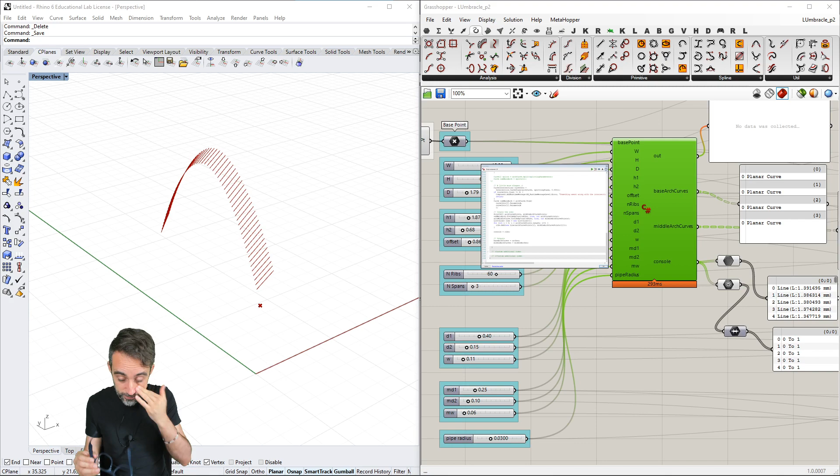So this is going to be part 2 of the YouTube stream that we started this morning, where we were taking a look at modeling the Calatrava's umbracle in Valencia, and we were doing this in pure C sharp, in C sharp scripting within Grasshopper.

I did not finish the exercise. We still have to design all the ribs, copy them and clone them, generate the profile beams and output them as well, and then the tubes, the surfaces. Hopefully that's not going to take us very long.

I think we're like most of the way there, so I think we probably want to wrap this up a little bit earlier today, because it's also super nice out there, and I would like to enjoy the Saturday, and you guys probably want to enjoy it too.

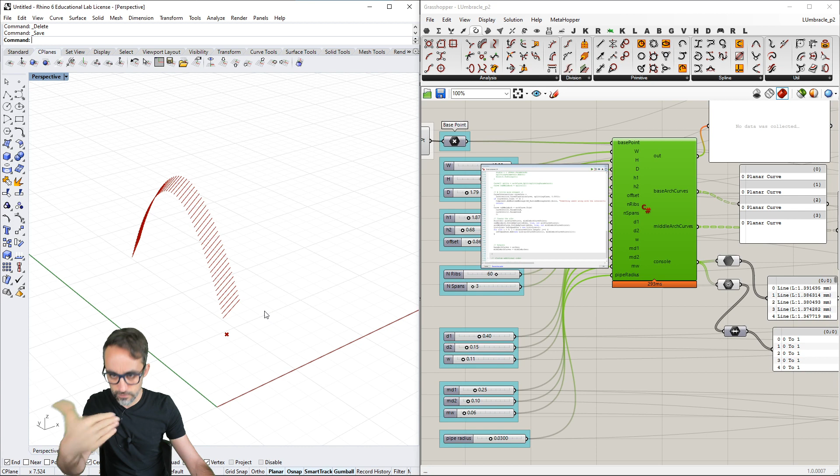But since those points are actually the exact same ones as the one that I have here, I can basically just take all those points and move them to the right, or create new points on the right hand side at a distance of span, and then just use those as the base.

So for example, arch curve points, I'm going to refactor this to be on the left, arch curve points on the left. Then I can, for example, take it back. I'm going to create a new curve on the right, and subdivide that one... no, I'm going to stick to what I said.

Okay, so I'm going to say now points arch curve on the right. This is going to be equal to a new point array, which is going to have the same amount of points that are currently here on the array of points on the left.

So I'm going to create an empty array, points on the right, and then with a for loop, I'm going to populate this array with copies of the points that are on the array of points of the left arch. This is very hard to explain.

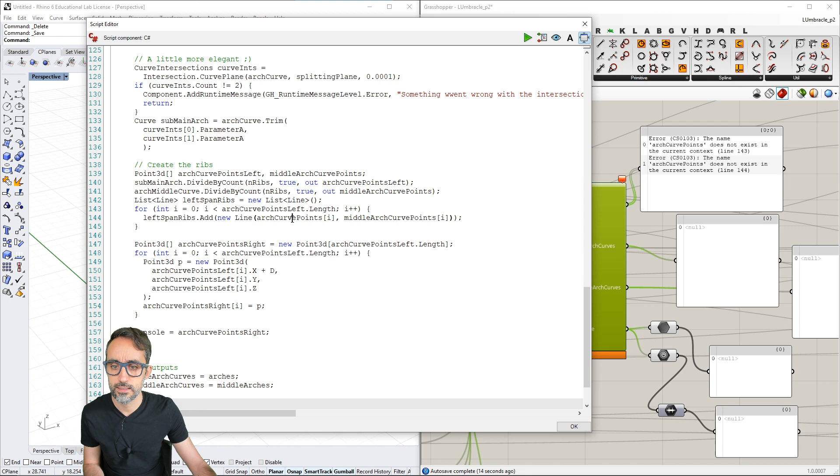Okay, arch curve points that don't exist, 143. So when I was refactoring this one, I have to remember to refactor this, and this also has to be refactored there. Okay, and then you can see that I have here my points on the left, on the right. That is looking good.

And then now that I have the points on the right, I can say, well, let me create a for loop. Let me create an empty array, an empty list of line elements. That's going to be right span ribs. It's going to be a new list of elements. Okay, and then with a for loop, I'm going to go over all of those elements.

So that's going to be arch, all the points on the right hand side, and then i++, and then here I'm going to say I'm going to create a line. L is going to be equal to a new line between 2 points. Which 2 points are those going to be? Those are going to be first the first point on the right arch point, so this one, okay?

And then the second one is going to be the points in the middle arch. Those were here, middle arch curve points. Also, the one in the same position, the one in position i. And after that, I'm going to take this and I'm going to add the line that I just created, L, to this array. Let me see if that works.

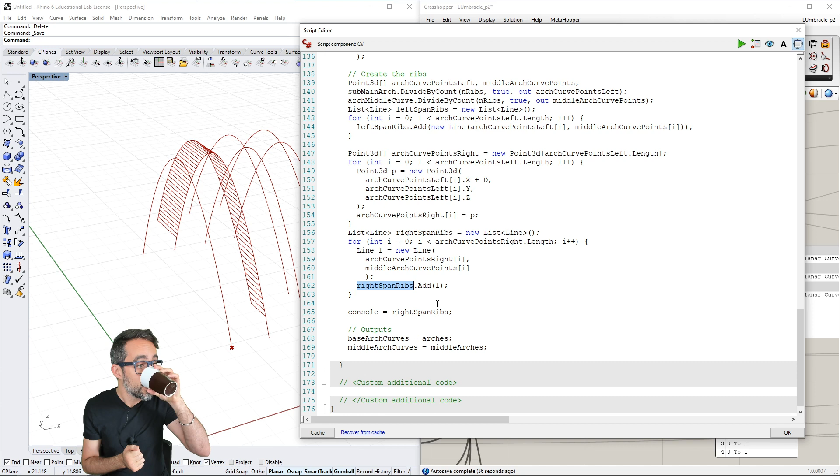So now what I need to do is I just need to create a data tree, and one by one for each one of the spans, start copying and moving all these ribs in sequence. Okay, let's get that going.

So how are we going to do this? Well, just like we did before, we have a data tree, and then for each data tree, we take for each span, we take all the left ribs and the right ribs, we clone them, we move them, and then...

Do line elements have cloning? Let me check that. L dot duplicate, curve, copy, clone, closest point equal extend through box. Good. I knew this was going to happen.

Okay, so we can do this, and then we can just say duplicate curve. Doesn't line... it doesn't belong to geometry base. Interesting.

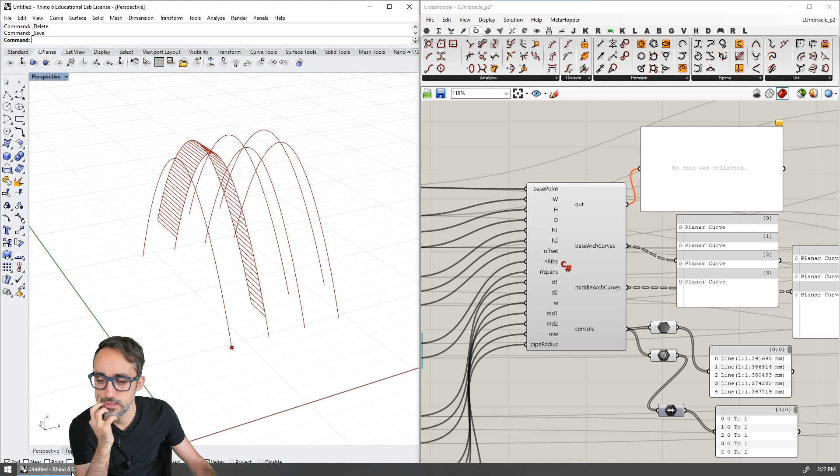So let me try one thing out. Line foo equals a new line between 0,0,0 and 1,1,1. Line bar equals foo. If I take point at, to NURBS curve, point at length, extend distance to, so we can't really.

Interesting, because they're just lines, it's going to be more difficult to... So if I do this, does foo change? Foo, does the point in foo, is that a reference or a copy? It doesn't change, so it is a copy, so I can just copy them.

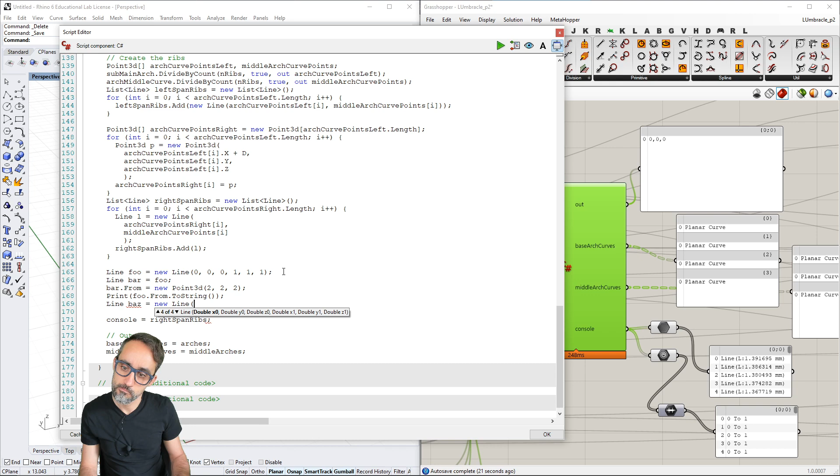So do I have something like baz is going to be equal to new line... So can I just add to this a new vector 3D? This is a little complicated. This is over complicated.

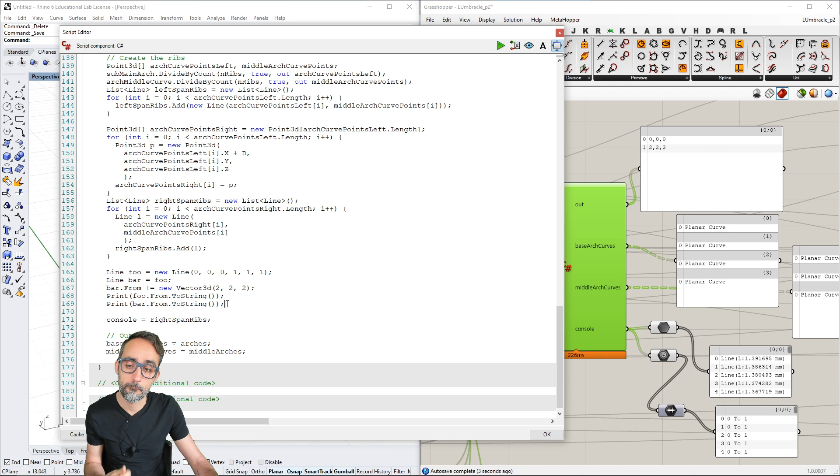Print bar from to string. Am I complicating things around here? I think I am, yeah. Well, this is how we started, so we're going to have to do this.

I hope I'm not going to mess this up. Okay, so where was I? I was saying that we're going to do a data tree, and then we're going to copy everything, and we're going to... okay. All right, so let's create the data tree.

Okay, I'm going to create the base ribs here, and then I'm going to create, okay.

Let's get to it. So I'm going to create the ribs data tree, and then very simply, I'm going to create a data tree of line objects, which I'm going to call rib lines. This is going to be a line object.

Then we need to create a for loop which is going to iterate over all the spans that we have. So that's i is less than number of spans, i plus plus, for all the ribs on the left.

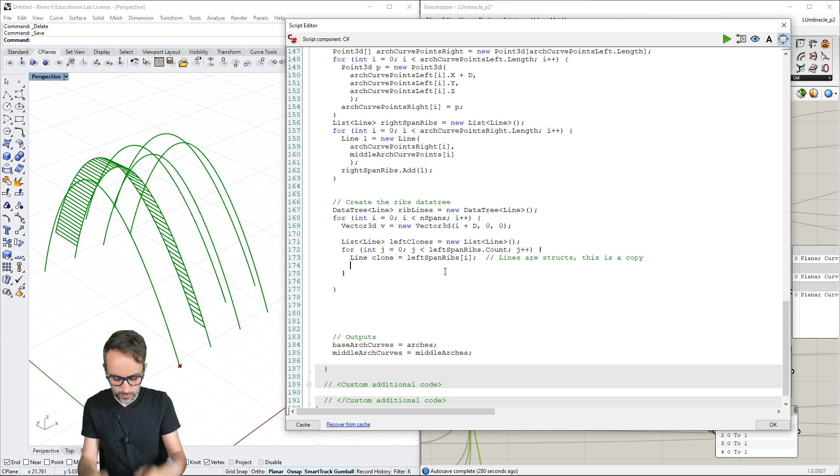Okay, so let me show you. Now that we have clone here, in order to move it - lines don't have the duplicate curve method, the duplicate method that we've used before, and because of that we can't really translate them, and they also don't have a translate.

And this is also because since they are structs, they do not inherit from the GeometryBase class, and therefore they don't get all that goodness.

So what we need to do is be a bit more manual here. We need to take both the starting point and the end point of the line, move them with the v vector, and then that becomes the modification and translation of the curve of the line.

So here what we can say is clone dot from, which is the point where the line segment starts, and then increment that location by the vector v.

And then we can also take clone dot to, which is the end point of this line segment, and do the exact same thing - increment its coordinates by the coordinates of vector v. Okay, and we have this now. So we have created a copy of clones here.

Once we have that, what we need to do is in the rib lines, create a data tree, create a new branch. So grasshopper path equals new grasshopper path, like we did before, and use i as the index of that path.

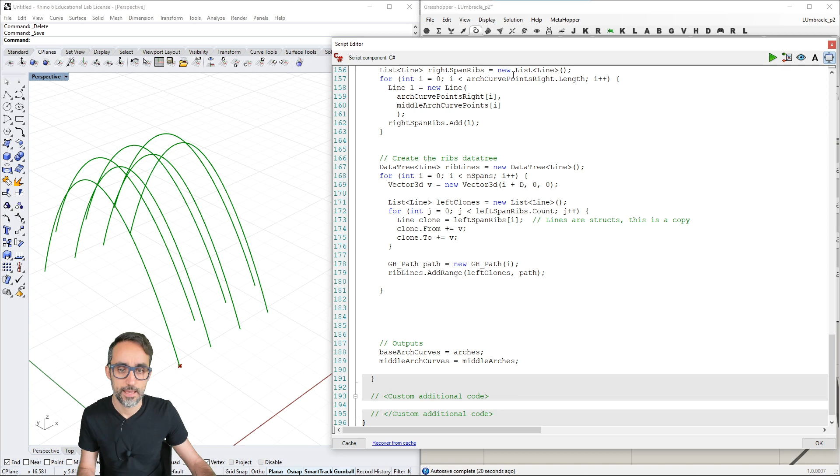I may not want to use rib lines here, because it's a duplicate name with this. So I'm just going to use, for example, rib axes. And here I'm going to do that here as well. And then rib lines is going to be equal to rib axes.

I do that, and it looks like nothing has happened. What do we have here? Oh, they're empty. I forgot to add the clone to the list of left clones, so we were doing the process but those lines were going nowhere, and this list remained empty. So we were adding empty lists to the data tree. I do that, and it doesn't work because I've misspelled something.

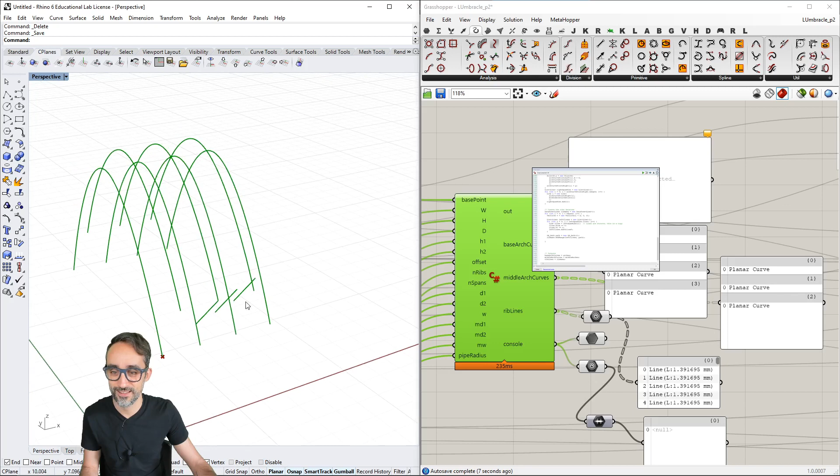Yeah, I said clones instead of clone. I do that, and ooh, something went not very great. I've only moved these 3 lines here. Let's see what happened. It's probably something with the left span ribs dot count, line clone. Okay, let me take a look at this.

Simon, can you create a curve of degree 1 between points instead of a line? We can do that, but that would create a curve object that is more expensive computationally. It's not as clean, as lean as a line object is.

So even at the expense of the code being a little more tedious, I want to keep it as the simplest geometry object possible, since these are straight lines, which is going to be a line. If we were to turn those into NURBS curves of degree 1, each one would be much heavier because it would have the control points, the knots, etc., and we don't really need that. So even though it's a bit more tedious, the resulting geometry is going to be much easier and leaner to handle by Rhino. So okay, what are we doing here?

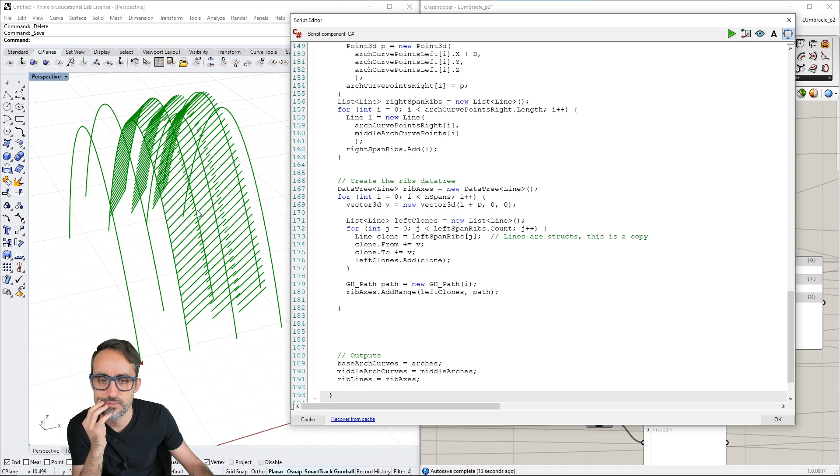Huh, but they're also not where they're supposed to be. Okay, so console equals left span ribs.

There's something odd here because this should not look like this. Can anybody see what am I doing wrong here? Oh, this is I. No, that's I. That should be J. And why are they moving?

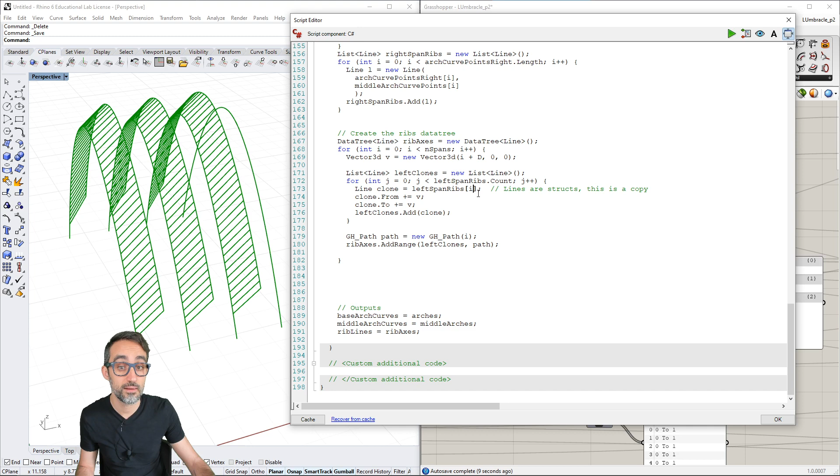Oh, because it's I plus D. It's I times D. Okay. All right, okay. So that was it, and that was here. Okay, so we're good.

Yeah, this is what happens with coding, trying to code things fast. I am in a nested for loop where I'm using I to iterate over the spans, and I'm using J here to iterate over each one of the ribs. And here in left span ribs, I used I, the span iterator, as opposed to J, the rib iterator. So if I change that to J, now we get this for each one of the lines.

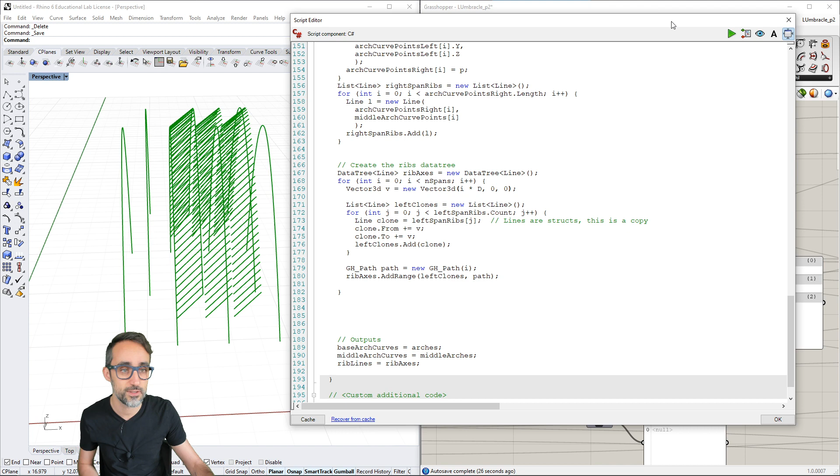But also you guys can see that they're not exactly where they should be. The first one should be here, the second one here, and the third one here, and there's an offset, and this is because I also made a typo here. This should be I times D - the number of spans times the distance between spans, instead of plus. So I'm going to change this, and have it here.

Okay, that is great. And the tree that I'm pulling out of rib lines also looks great because it's branch 0, branch 1, branch 2, and they have all these lines. Okay, so that's great. So let me just fill in for the ones on the right. This is going to be super similar.

I'm just going to take this and say right clones is going to be equal - be careful with copy pasting, okay? So right clones, new list, blah blah blah. This should be right span ribs, blah blah blah, and then clone is going to be right span ribs, clone from clone, and then right clones add clone.

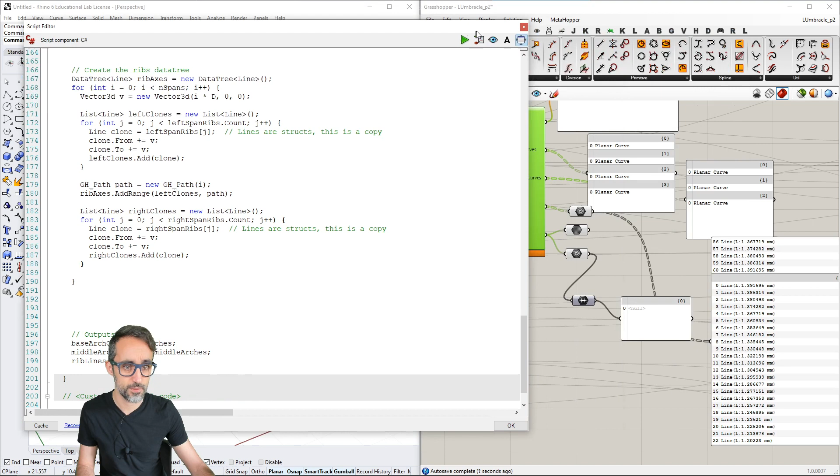Okay, if I run this, there's no errors, and then I can copy paste this and path, new path, blah blah blah. Actually this is redundant because I already have the path, right? So what I want to do is right clones - I want to do this, and then you can see that now we just duplicated the clones on the right, and they have been added to the tree where they should be, on branch 0, branch 1, and branch 2.

However, I hope you already know me at this point because this is nice, but it's not as clean as it could be. What happens is I've done this very fast, and now in branch 0, we have all the lines, all the ribs on the left, and then continuously, without separation, the ones on the right. So if I needed down the road to make a distinction between the ones on the left and the ones on the right, maybe the sun is hitting from a different orientation and I want the louvers on one side to be thicker than the other, whatever.

I would have to manually go here, divide the list in two, split them, whatever. So since we're here already, why not create a nicer data tree structure where the ribs on the left and the ribs on the right are much easier to see and are already separated in different branches.

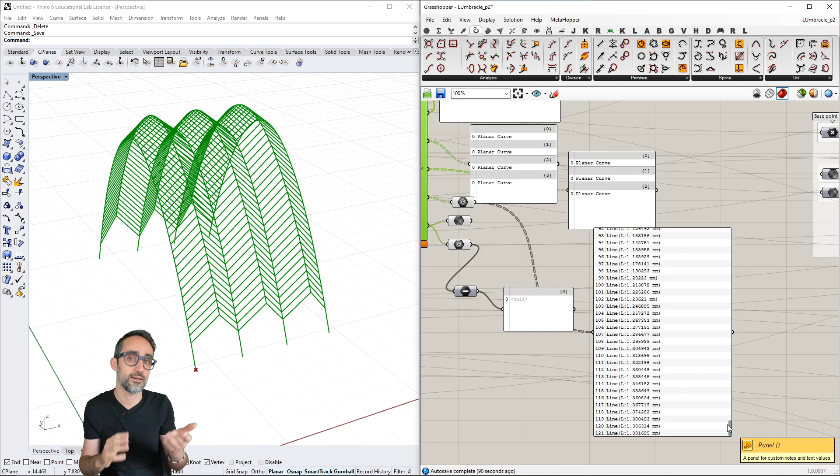So what I'm going to do, I'm going to do it in a different way. You could argue, well, if you're now creating 3 branches, 0, 1, 2, because you have 3 spans, why not create 6 branches, 0 through 5, and the ones that are odd are the ones on the left, and the ones that are even are the ones on the right. We could do that, but that's also not entirely clean.

The nice thing about data trees is that the branch allows nesting of levels. So because we have a modular system that has 3 spans, I would like the first level of the data tree, the first number, to tell me which span I am in, and then I'd like to add a second level to the branch, a second number that tells me if it's 0, it's the ones on the left. If it's 1, it's the ones on the right, and then have like a branching data tree structure.

That's actually super easy to do, because we already divided that process very cleanly here. What we can say is I can create first for the ribs on the left, a new path. You see how instead of creating, I can create an empty path, a path with one index, a path with an array of indices, and then I can create a path copying it from another path.

So what I want to do is create an array of indices that represent the levels of my data, of my branch. I want the first level to be the span that I am in, so that's going to be i. And then the second level to be 0 if it's the ribs on the left, and 1 if it's the ribs on the right.

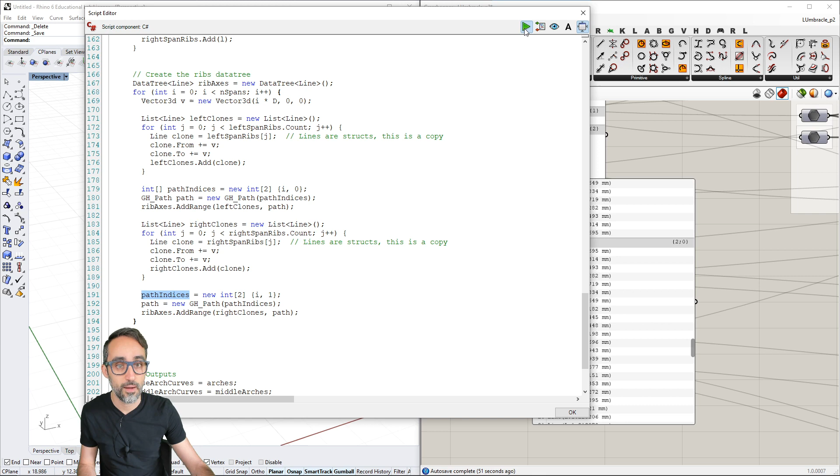As I run that, check this out. We have 0, 0 here. I'm going to lower the number of ribs to 10 only. And then we have here 0, 0. It's span 0, so both have span 0, but then 0 is the left. This is very hard to say, but these are the ones on the left, these are the ones on the right, and then these are the ones on the left, these are the ones on the right.

Can I plug in here this thing so that I can see. Look, you guys can see, we have this branching structure.

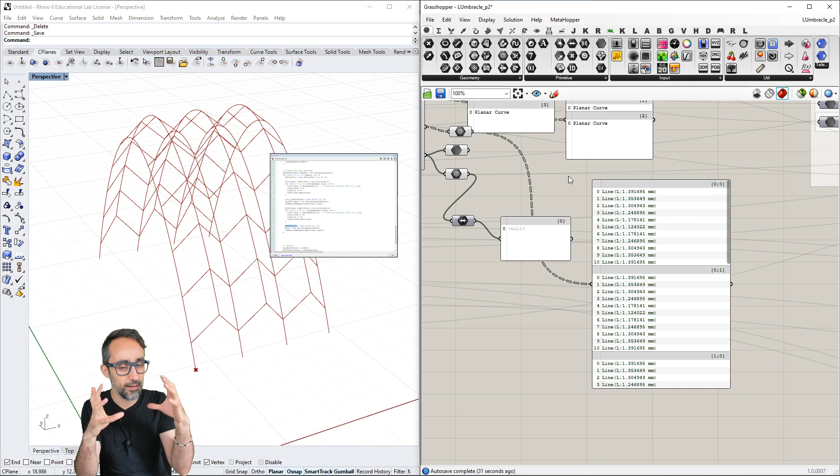This is representing the structure of the data tree. These are the elements, these are the spans, and this is how they separate between left and right. I think this data structure is much cleaner as an output, and whoever was to take this data could operate much more cleanly with it. So I find that solution much better and much more pro, so I'm just going to go for that.

Okay, so that was a lot. But I think we're ready now. We basically have the whole building already.

Now with the number of spans, we have the whole building written in C# script, and then we can just modify the width, we can modify the height of the elements. Oh, this is actually quite cool. And then we can make the spans wider. This is like the Madrid airport almost. This is kind of cool.

Now what we need to do to complete this is, if this was a competition, create solid object surfaces so that we could render this, as opposed to the lines we're doing here, which could be used as an axis for the structures. So let's go ahead and create the variable thickness beams for the arches and create the tubular pipes for the lines. Okay, let's do it.

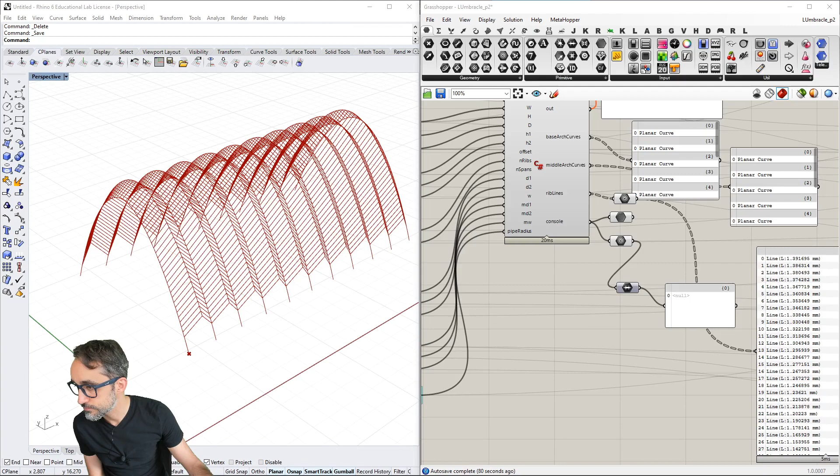Okay, I'm going to load here the diagrams, the diagram for the beam. Okay, this one here. Okay, I'm going to save this.

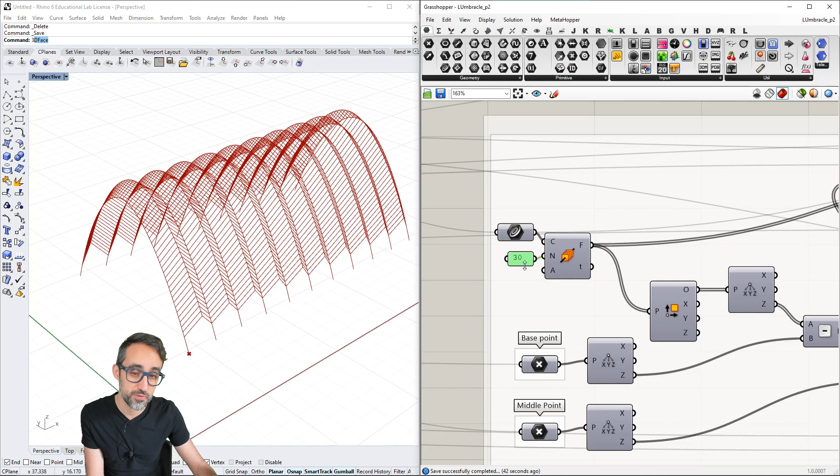So what else, and then how are we going to start? Let me remind myself, how did we do this before? We divided the curve into a bunch of points, and we hard-coded this to be 30. That was a little arbitrary, but whatever.

So we found perpendicular frames, and then created rectangles with variable thickness. And then based on the rail, we just did a sweep with one rail curve. Let me look that up before.

And then we get B reps, perform sweep. And then perform sweep, we get the curve, blah blah blah, rail, cross sections, and we get an array of B reps. Okay, we can do this, I think.

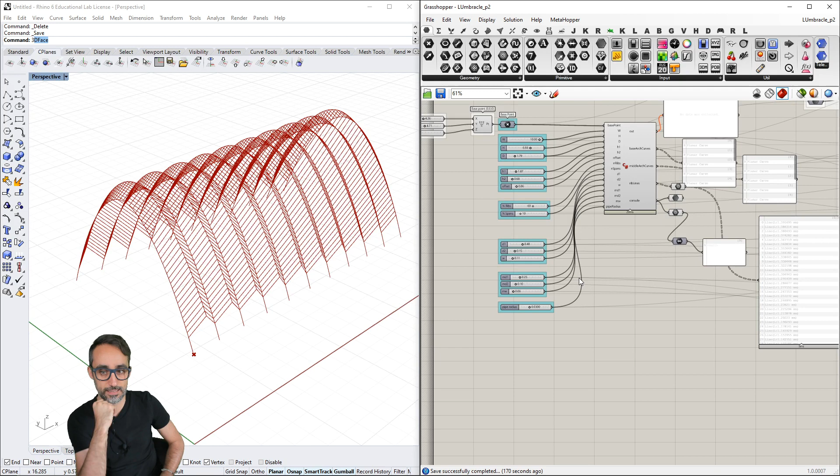How can we create a rectangle on a plane? That's easy, right? Okay, we have Rhino geometry. Do we have rectangle here? Rectangle3D structure: represents the values of a plane and two intervals that form an oriented rectangle in 3 dimensions. And can we turn this into a NURBS curve? Yes, okay.

Okay, that's a little complicated. Maybe we can start with a circle. Is there a circle on a plane here? I don't think there is, no? Circle structure, okay, represents a circle in 3D. The values are used: Circle, plane, initializes a circle on a plane with a given radius. Plane and radius, okay. So we can start with a circle. And then D1.

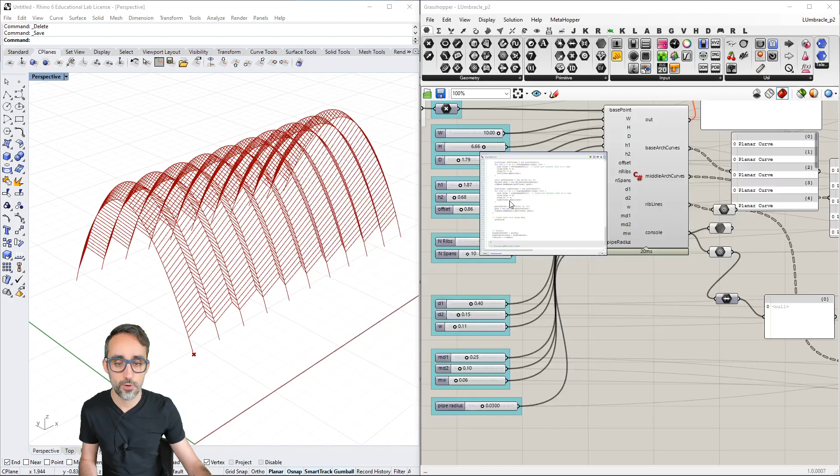There's got to be something in RhinoCommon, and I was looking it up before, and we have the curve subdivide get perpendicular frames method, which gives a collection of perpendicular frames along the curve. So that's probably going to work. The return type is a bunch of planes, which is exactly what I want. So let's say plane perpendicular frames main arch equals arch curve dot get perpendicular frames. What this function needs is an IEnumerable, which is just a way of saying something that is a list-like element, like an array or list, of the parameters.

It kind of sucks because I can't really tell it just gives me to subdivide this in 30 different frames. So I need to give it the parameters at which I want those perpendicular frames. So we need to do something before. We need to figure out, for this curve, how to subdivide it into however many elements and then get the parameters of the curve at those subdivisions.

So I'm going to put this on hold for now, and rely on this other method, curve divide by count. If you see, this takes how many segments and whether I want to include the ends or not, and the return type is an array of doubles that are the curve parameters at those division points. So given the curve and how many segments I want to divide, it gives me the numerical values of those parameters along the curve. This sounds really useful.

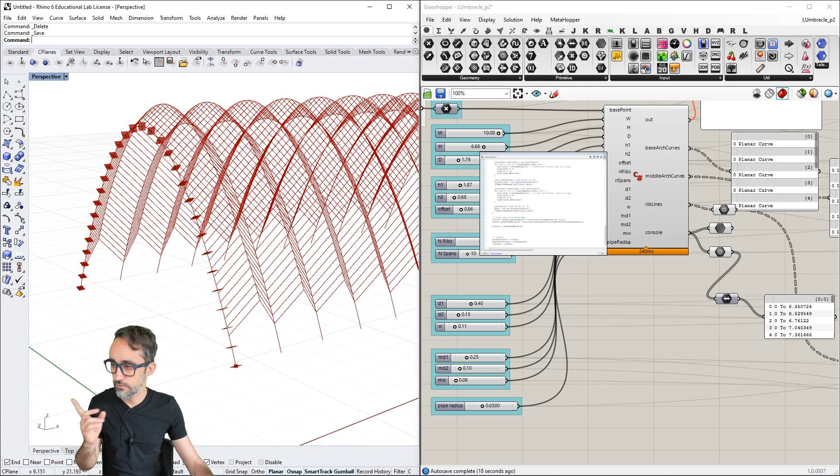Now that we have that, I can use these parameters. Let me output all these planes to see if they make sense. I'm going to run this, and it looks good. It looks like these planes are more or less evenly distributed, and I like that there is one exactly at the center of the curve because I want that kind of symmetry. I want this to be exactly the size of D2, just as we had in the diagram. So things are looking good.

Okay, now I'm going to use these planes to generate circles. How am I going to do this? I'm going to create a circle array of sections, and this is going to have the same size as the number of planes that we just created.

I'm going to go ahead, and with a for loop, I'm just going to create as many circles as frames that we had. So this is going to be equal to sections dot length, then i++, and here for each one of the planes, plane PL, give me the plane that I want. Then circle C is going to be equal to a new circle that I'm going to create with the base plane and the radius. For the radius, I think I'm going to use lowercase w, which I think is one of the input values, but this is going to be a placeholder. I will change this later. And then sections i is going to be equal to that circle that I just created.

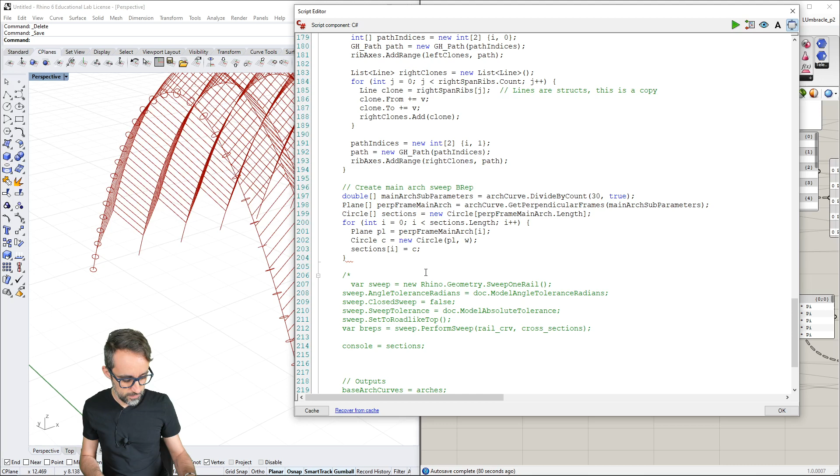I'm going to rewrite it so that it uses the variables and all the stuff I've been working with. So how are we going to start? I'm going to say sweep one rail, sweep operation, is going to be equal to a new sweep one rail object. Then the next thing, I'm going to set some variables, and I'm going to call this sweep.

For example, angle tolerance in radians—I don't know what this really means. We could look it up, but do we have access to the doc property? Yes, we do have access to the document property, so we're just going to keep it like that. Is this going to be a closed sweep? That's going to be false. Is this going to use a sweep tolerance? It's going to use the document tolerance mode. And then sweep is going to be set road-like top. I have no idea what this means. We could look it up, but I'm just going to copy it.

If you're interested in really tweaking this, you're more than welcome to look at the documentation. Now what's interesting is that we want to perform a sweep. It doesn't look like perform sweep on its own exists anymore or is accessible to us. Let's take a look at that.

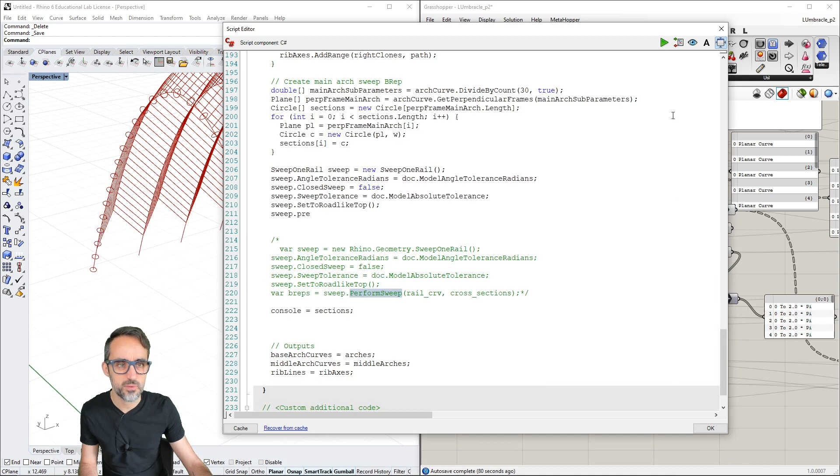Perform sweep curve, and this is missing the documentation. Perform sweep rebuild, perform sweep refit. Is supported in Rhino for Windows 6.25? Am I on Rhino 6.25? Where is Rhino 6.21? So maybe I don't have access to that functionality yet. Is that possible? I don't know.

Perform sweep, let's just try. Yeah, because it actually shows up. So maybe it was just not showing up on the panel, which is kind of weird.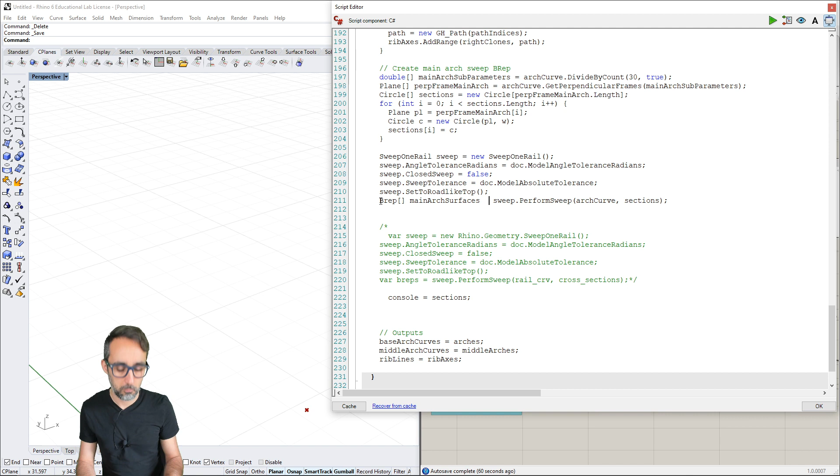But anyway, let's take the arch curve as the rail curve, and the cross sections are going to be the sections. This is going to return an array of B-reps, so an array of B-reps. What am I going to call this? Arch, main arch surfaces, for example. And then here I'm going to output that, see if it works.

Let me take a look at this. Do we think the problem is that these are circles, or do we think that this is just the sweep, perform sweep, rail, cross section, cross sections, rail, cross section, these cross sections?

Huh, okay. So maybe this doesn't really sweep, or perform sweep, and then curve rail, curve cross sections. Course curve. Curve rail, that's going to be the arch curve. So if I do this, if I do two curves, this works, but that's not what I want.

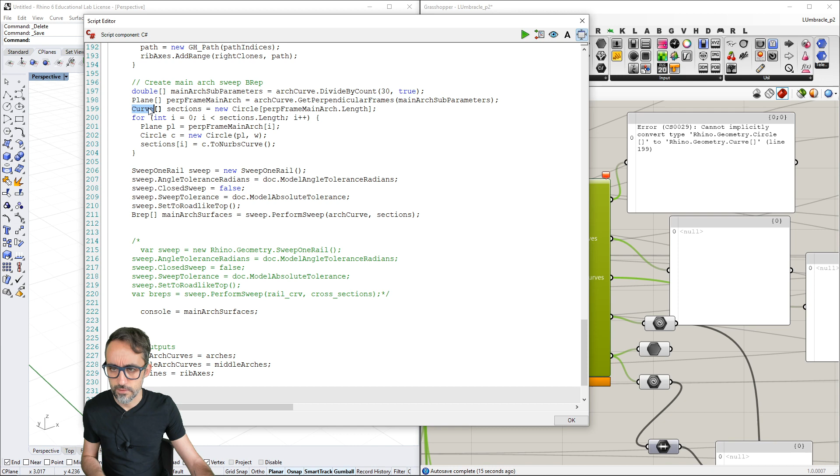If I do sections, I think, okay. Let's say I did curve here, and then I did ToNurbsCurve, for example. Is this going to work? Cannot convert. Cannot implicitly convert type. Sorry, here, I need to change this too.

Okay, all right, so it looks like, yeah, it's the circle, because circles are structs, I think. Yeah, so that's why it cannot. Yes, I think that was the problem, probably. Let me take a look at this, at circles. Circle structure, yes, so they're not curves. They're not really. Okay, so that's probably the problem.

Okay, sounds good. So some comments. Control S. Thank you for that reminder.

Do you have to declare a brep to use it? Yes, usually you have to. Can you use coerce curve? I'm not sure what coerce curve is, but I think what you mean is what we just did. We have to turn those circles, that are basically numerical entities, into NURBS curves that inherit from curve classes and can be used for lofting operations. Circle to curve, exactly, that's what you meant.

Don't you need a list of sections instead of an array? Nope, we actually don't, because this thing here — where is this? Where are you? Perform sweep. Perform sweep takes an IEnumerable of curve objects. What that means is that IEnumerable is technically an interface, and that means this method will accept anything that can be iterated through.

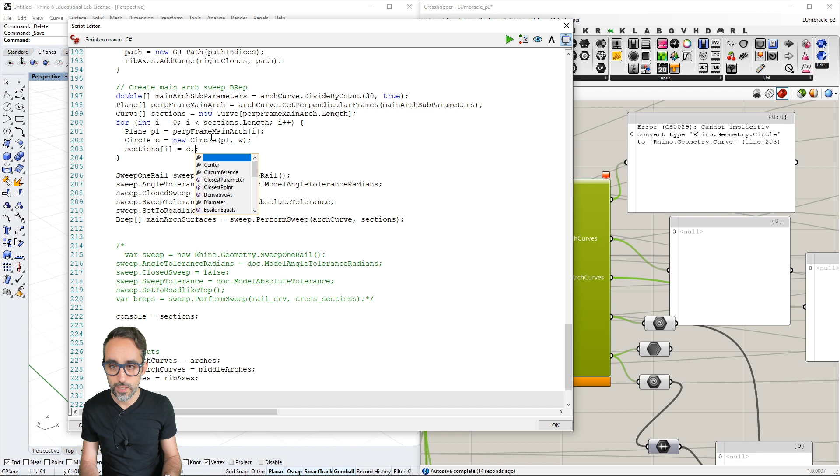So if we run this, you see that in line 203, we cannot save a circle inside of a curve array. The only thing we need to do is take the circle, and before we save it into this array, we need to turn it into a nurbs curve. So we can use the method called toNurbsCurve, convert it, and then save it into that array.

As we do that, I can now click here, and I can see that nothing shows up. But if I now take main arch surfaces and output it in the console output, you can see that I now have my pipe that has been swept over the rail, which is the base arch here.

Okay, all right, so I think we're good. I'm going to remove all this nasty code here. So I think we're good now for how to create a sweep, and I think we're in a good position now to start looking at how, instead of using plain circles, we can create rectangles and change the dimensions.

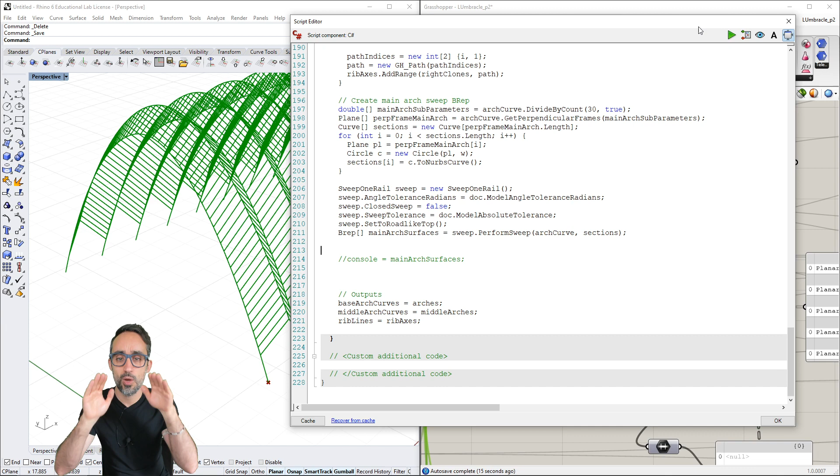So I think the first thing we're going to do is right away just create rectangles here. So we're going to substitute, instead of doing circles, rectangle 3D. I believe R is going to be equal to a new Rectangle3D. And then this is going to take a plane, so that's going to be PL.

And then the width, which I believe—let me take a look at the diagram—I believe the width was W. And we're just going to use, for all of them, D1. We will take a look at how to change that programmatically. So now the width is going to be W, which was one of the inputs, and D1, which was another one of the inputs. And then here, we're going to take the rectangle and turn it into a nurbs curve as well.

Before we... and then I'm running this, but I'm not seeing anything. Oh, because I did. Okay, and we can see that we have the arch, but the arch is not entirely what we would want.

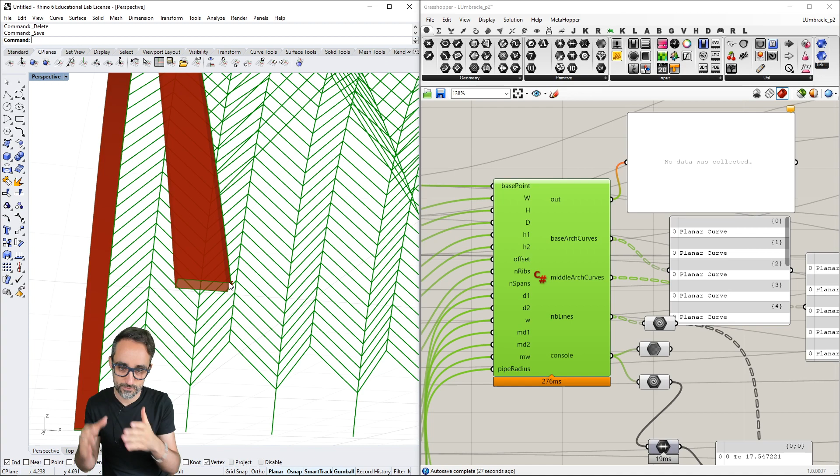First of all, for us, the width and the height are flipped. That's one thing. But also, you can see that the arch is here, and because we're using width and height, the rectangle is not applying that width and height at the center—it's applying it offset. It's taking the center, and the line is taking it as the corner of the section.

So what that means is that I'm going to have to work a little bit with my inputs, and I'm going to have to look at other ways of creating rectangles. So if we look at the overloads of what a rectangle accepts...

You can see that it takes a plane and then two numbers, width and height, but it can also take two intervals for the width and height, as well as two points in the corner. The points are going to be really messy to do, but if we use intervals, we can create an interval that goes from minus half the width to plus half the width, and minus half the height to plus half the height, and therefore we would have the rectangle centered around the rail curve.

So let's do that. I'm going to say interval width is going to be a new interval that goes from minus 0.5 times width to 0.5 times width. That's one thing. Then the interval for height is going to be minus D1 plus D1, and then I'm going to use these two—I'm going to use PL, width, and height.

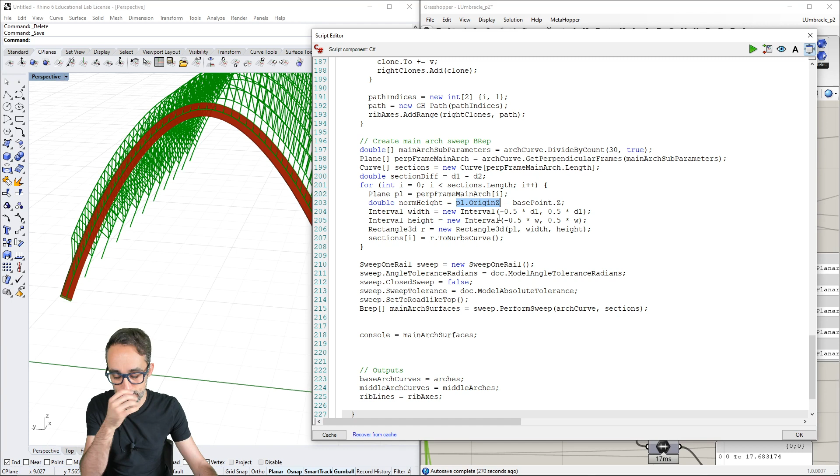So plane dot origin Z minus base. Let me say this again: the Z coordinate of the origin of the plane minus the Z coordinate of the base point. So that's going to be how far the center of this plane is from the ground. But it's going to be in absolute terms, in whatever units we're working with. But to make it proportional, what I want to do is take all of this and divide it by the full height of the building, which, if I remember correctly, is h.

So what that means is that if h is, say, 10 meters, and if the height of this point is 10 meters over the ground, then this point is going to have a normalized height of 1. But if this point is 0 over the ground, then its normalized height is also going to be 0.

Now once we have this, we can compute how much we have to decrease the section. So the new section height is going to be equal to D1, the base, minus the section difference, how much the difference is, times this normalized height. Can you guys see this?

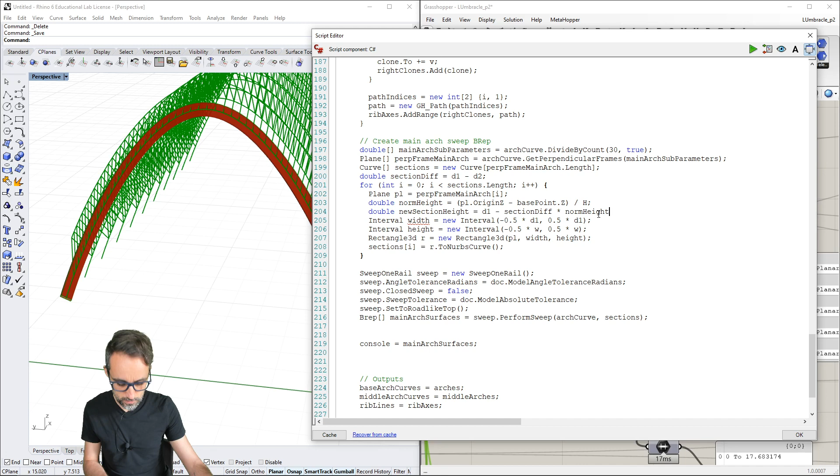So we start with the base, and this becomes greater and greater as we go up in the arch, then when this hits 1, which is at the very top, the section is D minus the difference, which is going to be D2. And then we use that now as the new section height. And I think that's it.

Is that true? We have an arch. The arch looks like here is much higher than this here. And here is 0.40, here is 0.15. Let's bake this and see if it's true.

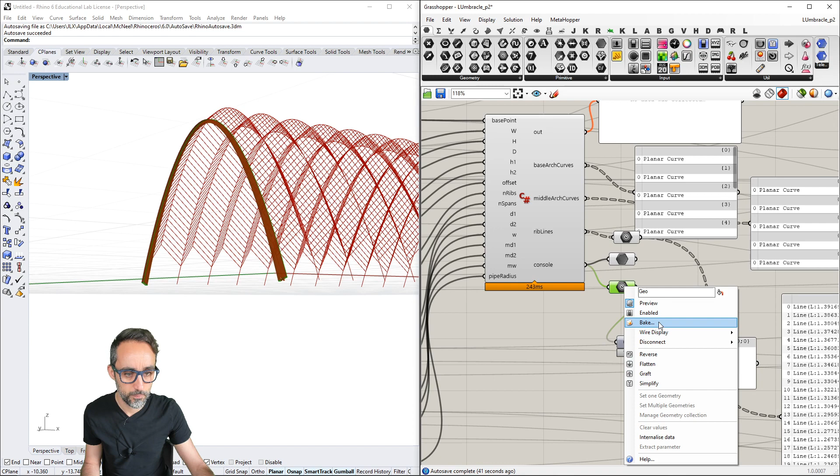So I'm going to bake this. Oh no, actually, sorry, let me bake. What did I just bake? Okay, I don't know what I baked. Let me bake the console output. So the console output is this one. Let me bake it. So now we have the surface here.

Nice, I think we got it. Okay, so awesome. So now we have the arch with the varying thickness. Very clean, very parametric, very procedural. We can tweak these things. So now this is much thicker on the top, and this is close to 0 in the bottom. That's also a kind of cool design, huh?

And with that, now we're ready to take this B-rep and to start replicating it down in the spanning direction, okay, using data trees. Shall we take a look at that?

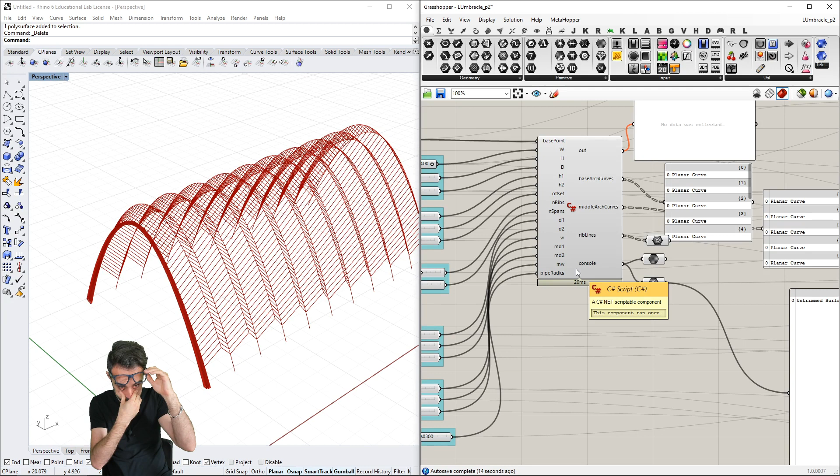How's everybody holding on? Oh, I've been doing this. Oh, it's been an hour and a half already. Wow, this is taking super long. Is there anybody? I still see no one.

Okay, I mean, we're almost done. This was the difficult part. We just need to replicate it now and do the pipes, and that should be it basically.

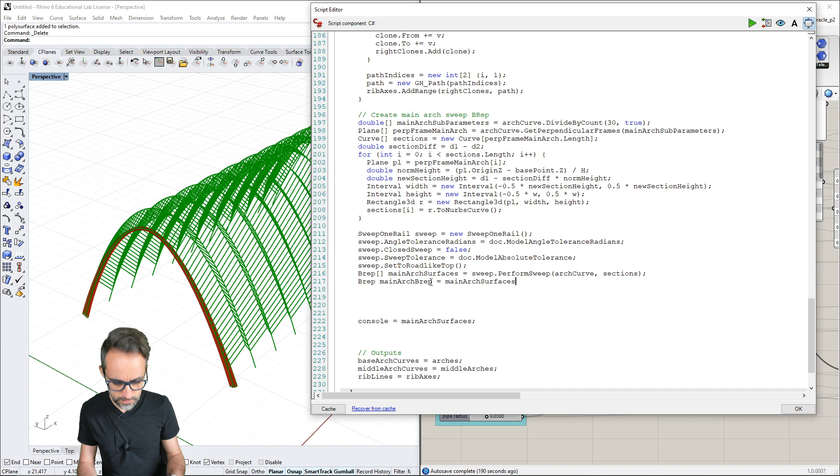So I want to make sure that before I start cloning this and moving them around, instead of doing that with an array, I do it with the one single B-rep that is the good result of our operation. So I'm just going to either take this, or I'm just going to make it more verbose. Main arch B-rep, okay, and that's going to be main arch surfaces, the first element of the list, okay, and this is the one that I will output here, and you're gonna notice something probably as I click run.

This is going to go from, you see, instead of going from a 2D tree with a path with two levels, it just becomes one, because instead of outputting an array, we are outputting one single element. So Grasshopper processes that in a different way, which is a bit cleaner.

And then now create data tree of B-rep arches. Okay, so first I'm going to create myself an output here. So that's going to be base arch curves, and I'm going to say base arch B-reps. Okay, so that's going to be one. I'm going to remove this stuff here, it's getting a little clogged.

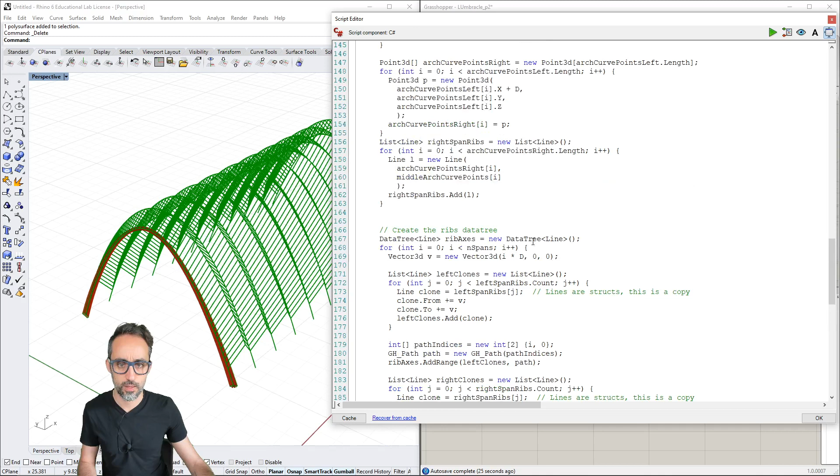And I'm going to go all the way down here and say, as usual, let's start a data tree of B-rep elements. Okay, of B-rep elements, and I'm going to call this base arch. Base arch.

Why do I always get stuck doing this? Base arch B reps, for example... B reps, but that's the same name, that's the same name. Base arch surfaces, for example.

And this is going to be a new data tree, okay, and this is going to be of the type B rep. And then here I'm going to iterate over all the spans, and then I'm going to take the B rep, and I'm going to take...

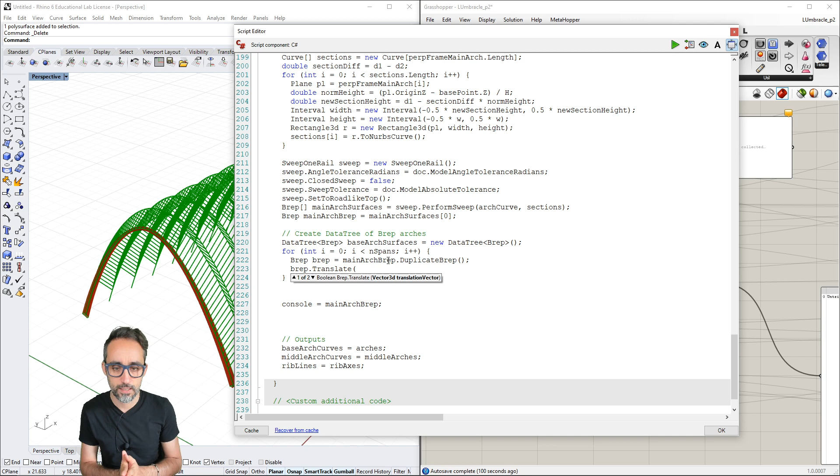Main arch B rep, and I'm going to duplicate it. I'm going to duplicate the B rep, okay, so to create a copy of it, and then I'm going to move it in X, an amount equal to I times D, which is the width of each span, and then I'm going to create a new path, a new Grasshopper path, which is going to be equal to a new Grasshopper path with I, and then to this data tree I'm going to add this B rep that I just created at the path that I just designed.

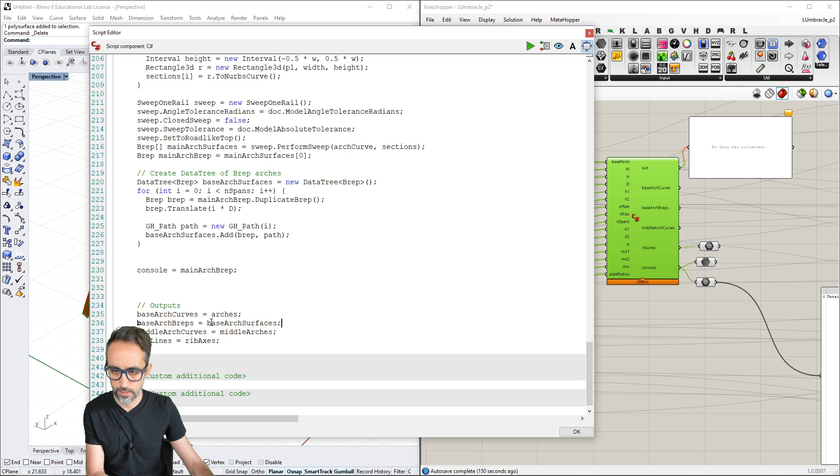And all the way at the very end, I'm going to output here. I'm going to say base arch B reps is going to be equal to this data tree that I just generated right now. And that failed.

Oh yes, sorry, because I forgot that this has to be XYZ. So that's going to be 0 and 0. Yes. And as I do this, things work well, and it looks like I have all those arches.

So this one is duplicate, so I'm going to remove the console. I'm going to stop outputting that, and I'm going to copy these so that I have a dedicated one. Exactly. So it looks like we're good, except that I need to do, just like I did before...

I need to add one more element to the span because we have one more arch than spans. So that's just going to be as easy as number of spans plus one here. Okay, we got this, and okay, so I think with this we are more than ready now to go ahead.

And then just, I know we have to do the arches in the middle. Okay, so we're going to do the same process but with the arches in the middle. Just to refresh myself, MD1, MD2, MW. Okay, so we're just going to copy paste that.

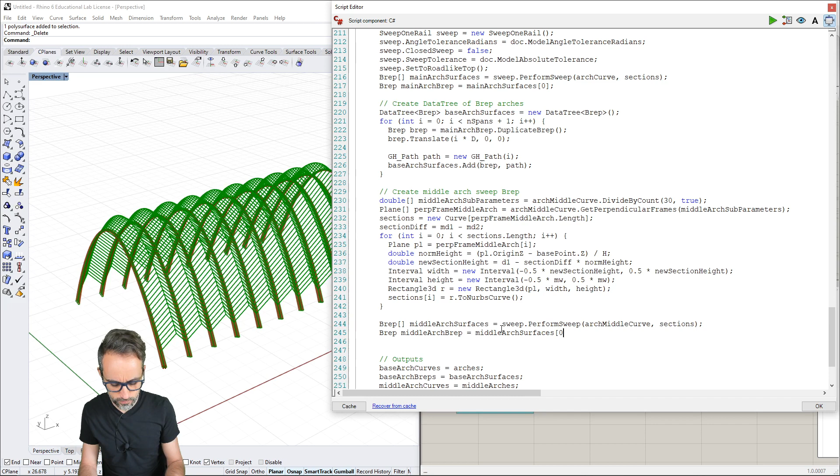Brep middle arch surfaces is going to be equal to the result of this, and brep is going to be equal to middle arch brep, which is going to be equal to the first element of the list. Let's output it in the console so we know if it's working correctly, and it looks good to me.

So right now this is looking very large. Okay, so if I bake this, it's probably not - it's probably way too large. So distance, this is 0.38. That is very odd. You see, there's probably some copy pasting that I should not have done here.

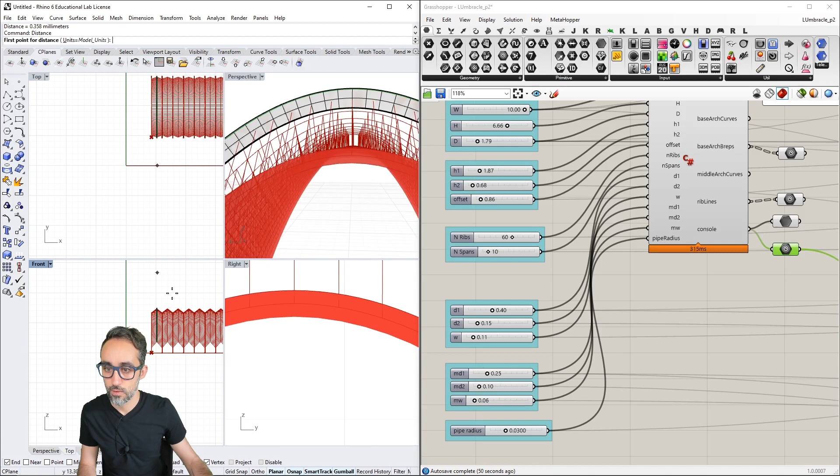0.358. Nope, that's not good. And distance here is going to be equal to 0.235. Yeah, so something is not working here. So let me take a look at what that is. It's something with the heights.

So section difference is MD1, MD2. Oh, you see the copy pasting - I was telling you, I'm subtracting from D1 as opposed to MD1. I knew it. So let me bake this again and make sure it's correct.

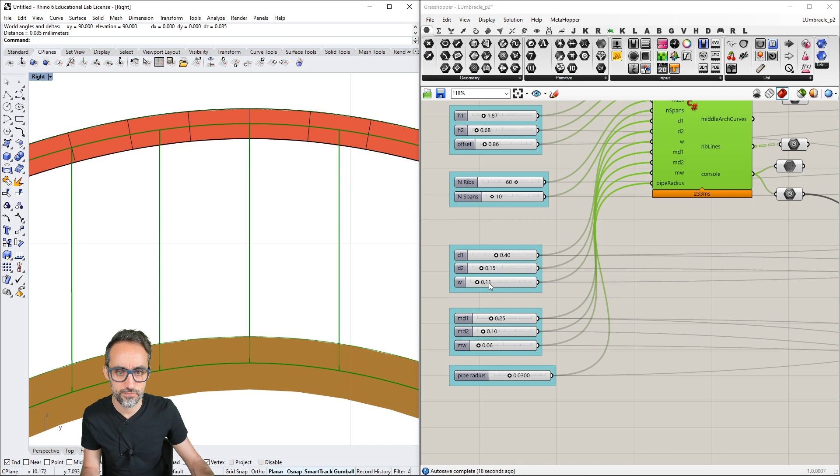So distance here is now 0.085. Did I measure this correctly? In the Z, 0.085, that's not correct. And this distance should be... this distance is 0.208. Nope, still not working. Okay, so...

MD2. Okay, yeah, the height - because the height is no longer the origin Z and the base point. The height difference, the normalized height difference, has a different rule now. So we have to figure out what is H for the main arches, what is full H, and what is the difference between this point and this point. So that is where things are not... yeah. You see, copy pasting never works.

Okay, so let's take a look at this. At the beginning, we made this list of middle arch points. This middle arch points is an array, a list with the 3 points we use to create the middle arch. So the first one is the one that has... or we could do this numerically. Let's do this numerically.

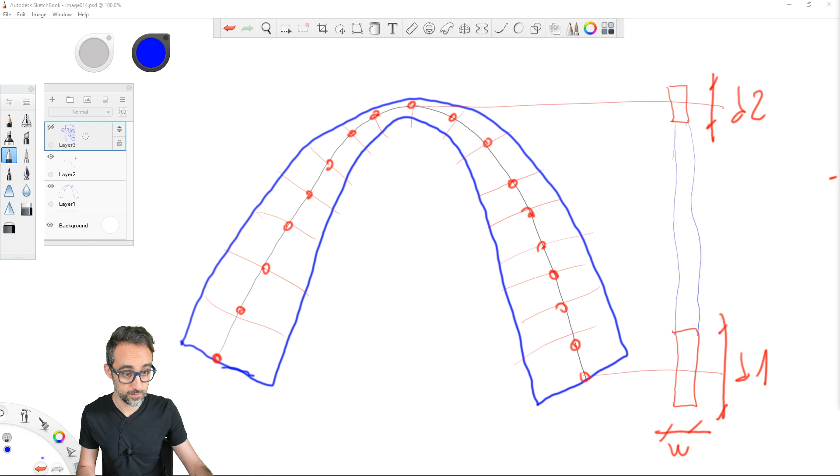As I do this, I don't know, things haven't changed a lot visually, but I'm still going to bake this to see. Oh, sorry - I've been doing all of this, all of this.

Sorry, I've been doing all of this in the diagram. So yes, what I just wrote was I added these three lines where I was computing arch base, arch top, and arch height - the height of the middle arch, how high the base of the middle arch was, and how high the top was. The height is the difference between those two. Then I replaced here: now the base is this new value, arch base, and the total height of the arch is this one. Let's see if this works.

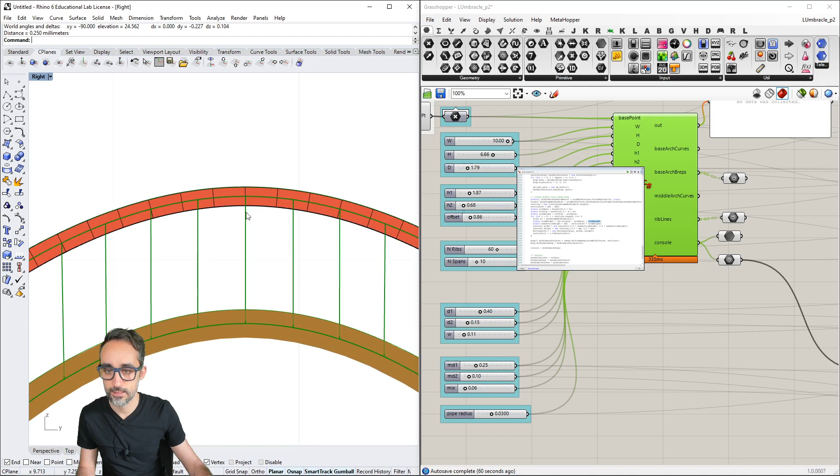So I'm going to calculate this distance, and this is 0.25. Now we're talking. And here on the right, this is 0.1 millimeters. So, okay, this is what happens with mindless copy pasting.

Hope you guys never do it, just like I did.

Okay, now let's write a data tree here, where we create a data tree for the middle arches. Data tree Brep middle arch surfaces is going to be equal to this stuff here.

I'm going to copy this. This is going to be Brep, so number of spans, we don't want to do plus 1 right now. Brep is going to be equal to middle arch Brep. We're going to duplicate this, translate it i times D. Path is going to be good, and then to middle arch surfaces, we're going to add this Brep here.

This gives me an error. Which is, what is it? Line 251. Oh yeah, the name is already in scope.

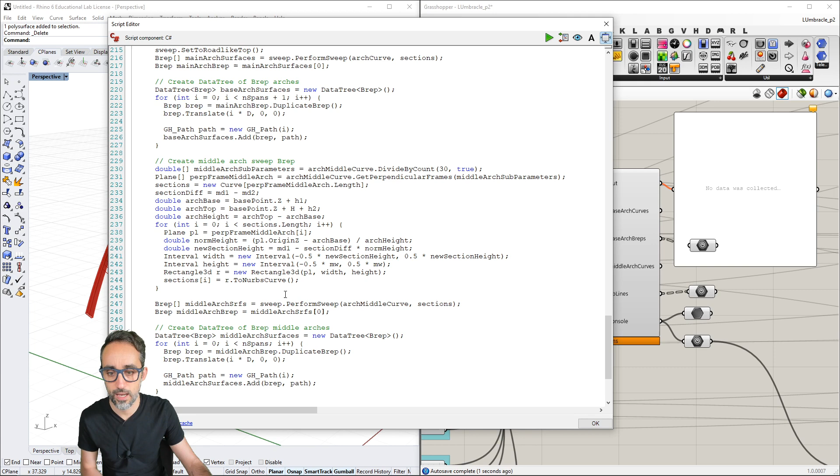So middle arch surfaces, middle arch surfs, for example, here, we're going to change that. Yes, I was just duplicating the name here with the data tree as well.

And let's create an output here: middle arch curves, middle arch Breps. Okay, we need to close this so that it updates.

Middle arch Breps is going to be equal to the data tree that we just created. Okay, and is that true? It is, it looks like it's true.

So we now have these, the middle arch Breps. They're full solids, and yep, okay, so we're good to go. So it sounds like the only thing that is left is just to do the piping. That's going to be hopefully super simple. Okay, let's get to it.

Okay. Oh, I'm so tired. Oh.

And let's finalize this. Is there such a thing as a pipe in RhinoCommon? Let's take a look at that. When we say pipe: mesh pipe, mesh create from pipe, create pipe method. Brep create pipe, it's a static method, and it takes the rail, the radius, local blending, pipe cap, fit rail, absolute tolerance, angle tolerance. That's a lot of stuff.

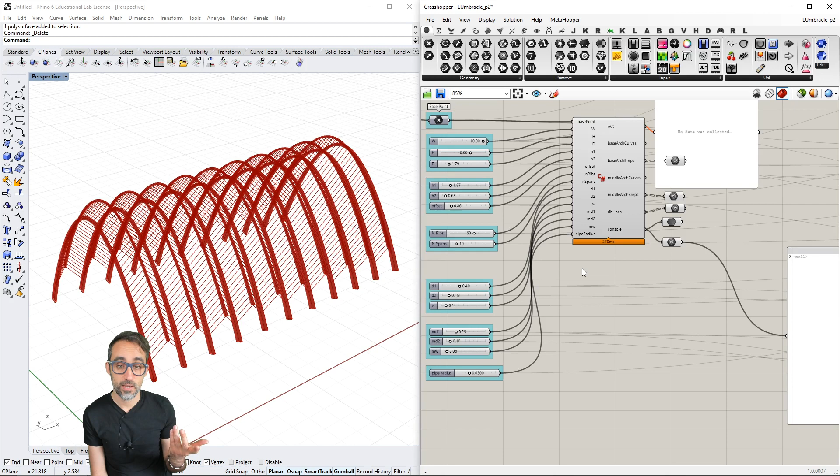Now the question is, do we want to create all the surfaces and then clone them, or do we want to do them from lines? I think we want to create them and then clone them, just like we've been doing, right? Okay, so where are we going to do this? These ribs, create the ribs data tree.

We can take those lines and, okay, so we're gonna do it here. We're gonna take the lines and then create a function that takes a line and a radius and returns a surface. We're going to write that ourselves too. That's probably going to be much cleaner. Yes, I think so.

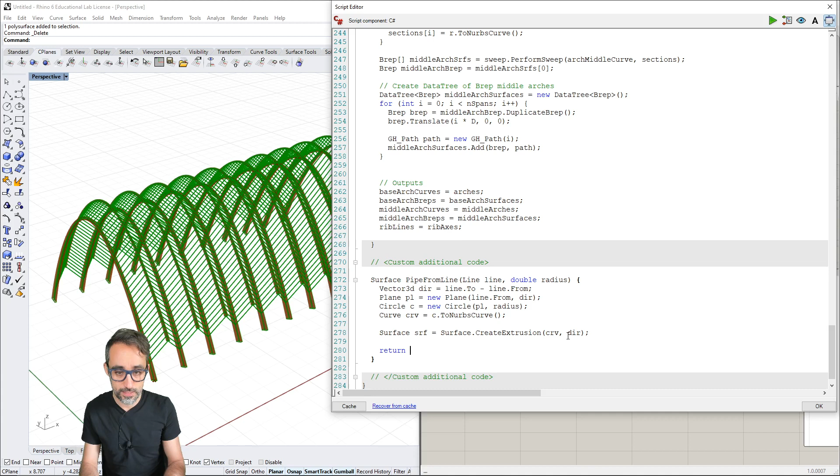I think now we're ready to go for this guy. So now the surface is going to be create extrusion. We have the curve profile, CRV, and we have the direction vector, direction. And I think that's it. So this is the object we want to return, SRF, surface. Okay, good.

So let's go back now here, let's go back to, and I'm going to copy this name because I'm going to forget it, of course. Here where we were creating the base ribs,

we probably want to create here a list of surface objects called the left span surfaces. New list, blah blah blah. And here, now I'm going to rewrite this a little, I'm going to put this here. So I'm going to say line L is going to be equal to this new line that we created here. Okay, and then I'm going to add the line to the list.

Okay, so that's fine. And then now I'm going to say surface SRF is going to be equal to pipe from line, that function I just created myself, and line, I'm going to use L which I already have, and radius is going to be, what is it going to be? Pipe radius, yes, so we have it as an input here. So that is going to be, where is this? Pipe from line, pipe radius, okay, and then

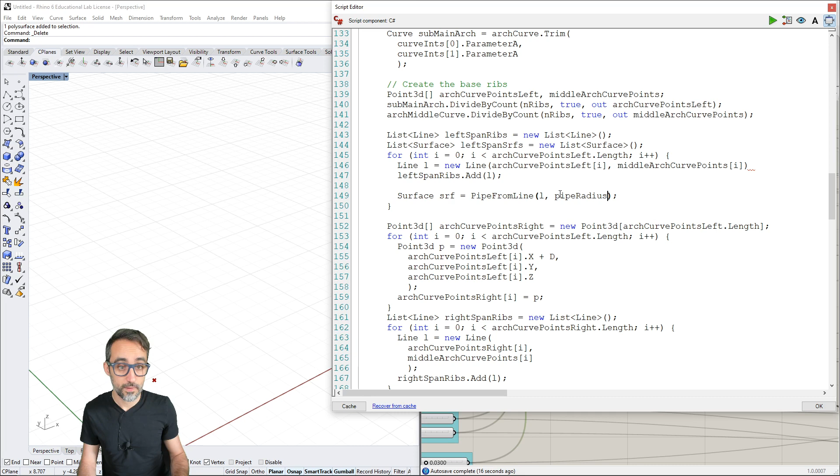after I create that surface, I want to add it to this list, left span surfaces. Add srf.

Okay, do I run this? It doesn't work, something is broken. 146 here. Oh yeah, I forgot this here, 146. Okay, and we don't see anything here yet because we're not outputting it yet.

So let me use the console to see if that works, console equals left span surfaces, all these guys. So I'm going to output there, and boom, turns out we are creating all those surfaces, and you can see all these pipes out there. So that's great, it's looking nice.

And what is the next thing to do? So I'm going to remove this. I'm going to do the same thing for the right spans. So here I'm going to create another list of surfaces, and this is going to be right span surfaces, and here I'm going to create a surface S is going to be equal to pipe from line L and the radius, and then right span surfaces add S.

Let me output this to the console to see if it works. Here, there you go, and then it works.

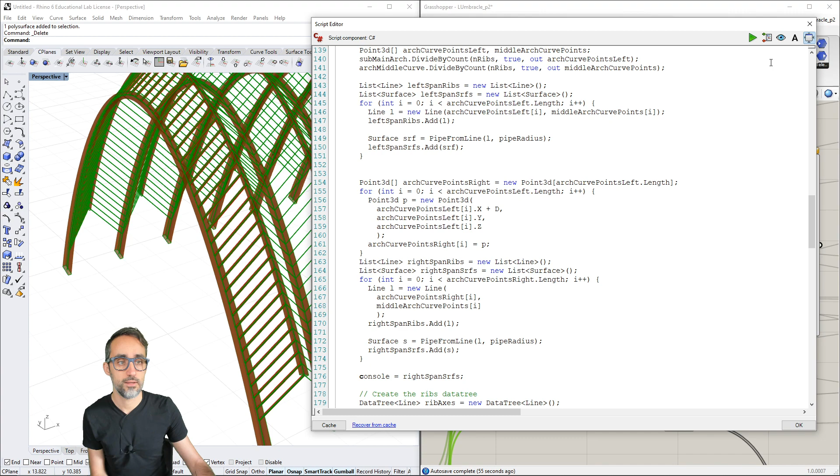We have them here, and now we're just going to use the data trees. So we're going to take advantage of all this for-looping that is going on here to also create a data tree of surfaces, and we're going to apply the exact same logic as before. This tree is going to have two levels: the first one is going to be the module, which span are we in, and the second level is going to be 0 for the left pipes and 1 for the right pipes. So let me create here a data tree of surface objects.

So, rib surfaces, new data tree, okay, and then surface, and then here we have the vector, left clones, we have the clones. So here I'm going to create surface left surf clones, new list, blah blah blah, surface, okay, and then here we have the same number of lines and pipes.

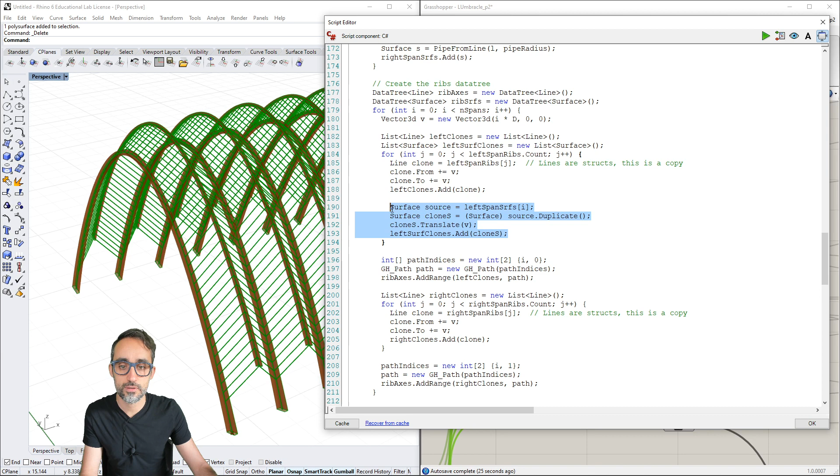Okay, and since we're here now, surface clone is here, left surface clone, so path indices, rib axes, so rib to rib surfaces, I can add a range, which is going to be the left surface clones path. Okay, this works.

So let me, rib lines, let me here on rib surfaces add an output, and here, where is it? Rib surfaces is going to be equal to... where did I have this? Rib surfaces here. I'm going to output this.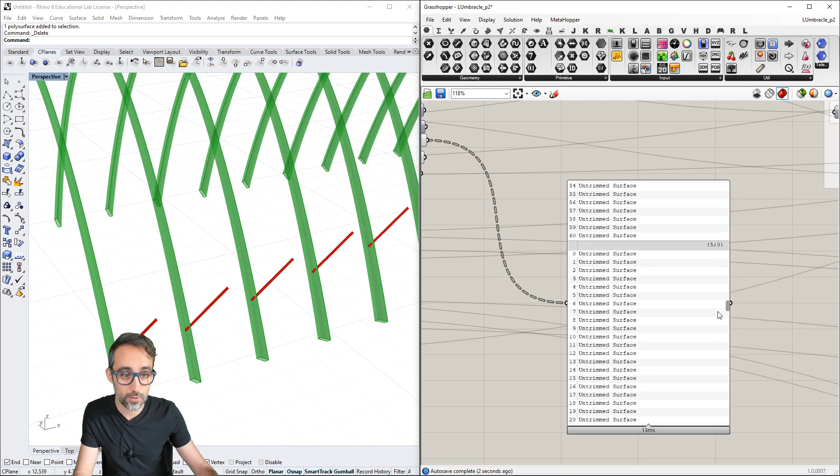It looks like, okay, so let me turn this off. Let me copy this here. Let me turn this off again. It looks like it's not working, and I am duplicating all of these guys. This is probably similar to what we did before, there's some problem with the I and the J. Yes, so here, instead of I, this is J here.

Okay, so that's great. Now we have all the elements on the left, and we are now just going to finish that off with the elements on the right. So there is surface left clones. Here I'm going to copy this, and I'm going to call it right surface clones, right span ribs, so blah blah blah, and then here same thing, source.

This is going to be right span surfaces, J clone, surface duplicate clone, and then right surfaces clones at there. And here we're going to do right surfaces clones here. And ta-da! It looks like everything is working correctly.

And it looks like we have everything. These are the B-reps, and these are the curves. These are the B-reps as well, and these are the surfaces. So it looks like everything is working.

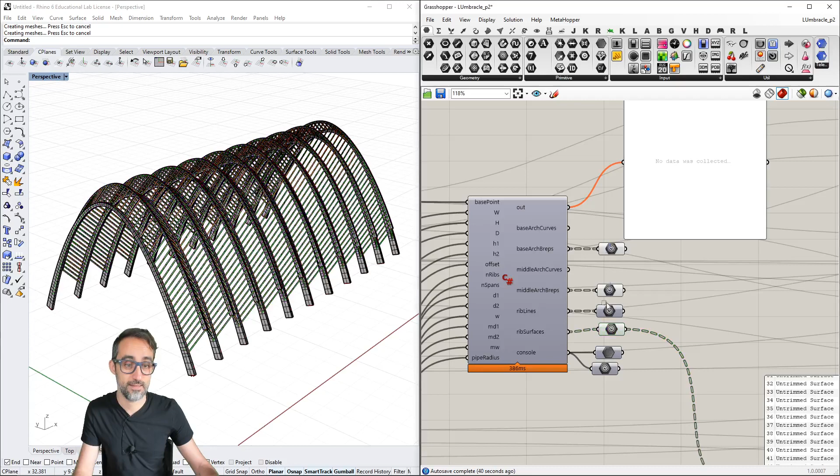So let me just do some baking so that we can see if everything works. Bake this, yes, and bake this, and then we're going to turn this off, and we're going to do a little bit of better shading. Oh, rendered, yes. All right, and here we go.

Finally, yay, that was a lot, okay? Doo-doo-doo, yay, fireworks, yay. All right, oof. Ay. Okay. Oh, that was a lot.

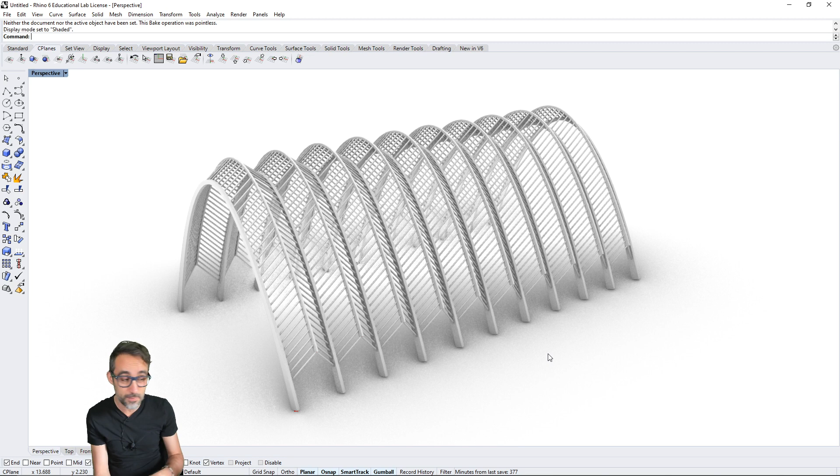Ooh. So, okay, so we're going to finish. I'm going to finish the video. I'm going to wrap it up somehow. What can I say about wrapping it up? So what we just did, and perhaps steps forward, so what other folks could do. Okay, so how many?

So, here we are. This is the modeling of the Calatrava's Umbracle building in Valencia, done in purely C# scripting. It took us a little time to get this together. It may seem a little tedious, but I think this exercise was incredible in that we were able to touch upon a lot of interesting topics, for example, how to create sweeps, how to manipulate data trees, how to customize the paths, how to rethink pipes, and for a very simple situation, just conceive them as a very simple extrusion.

I think that was a very good exercise, and I hope you guys could see the fine level of detail and control we get when customizing and writing these applications on our own. I'm fairly confident this component, with its 300 milliseconds execution time, is much more performant than the same code running on vanilla Grasshopper. So that's also an advantage.

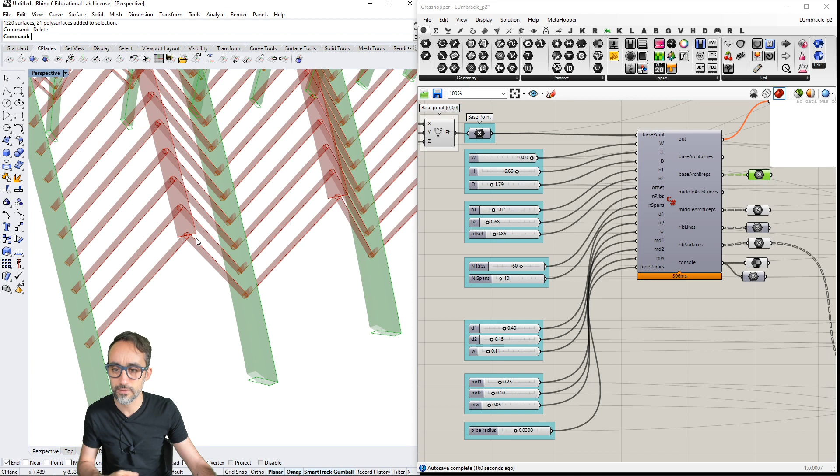If we zoom in here, you can see how these pipes actually get into the beam. We could have worked with some intersections to make that a bit cleaner. You see how this, for example, is not very clean — we're starting the ribs exactly at the beginning of this curve, which isn't a very realistic joint for real-world execution. Perhaps adding some kind of offset here, like we did elsewhere, would have been interesting.

But I'm going to leave all those additions to you, the viewer. If you want to pimp this exercise up, add geometry underneath the building, add people walking around, make it more fancy, or design the structure of the concrete beams supporting this platform — it's totally up to you.

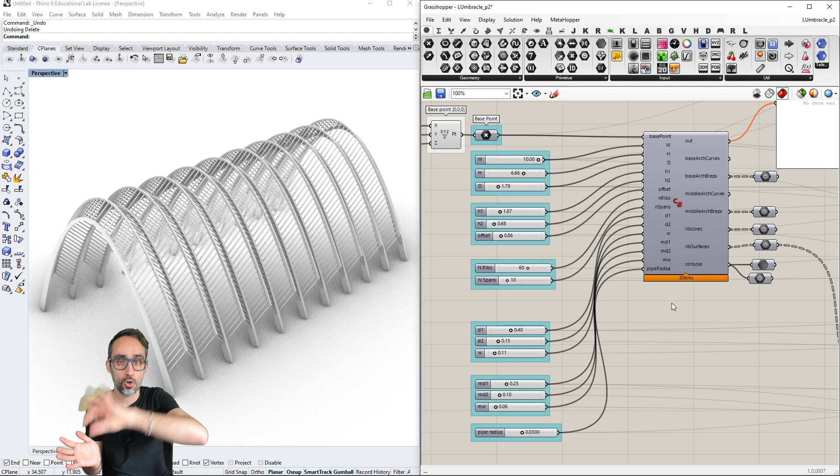This exercise is very interesting if you're interested in learning how to supersede visual programming languages and get a bit more low-level exposure to how these things are implemented internally. This exercise will be particularly good to learn things such as customizing data tree structures in Grasshopper, how to do complex sweeps along rails using Rhino Common, and some other abstractions we're going to be using here for the sake of optimization.

I would like to... what? I would like to what? All right, well, it's gonna be take 3 now. Hey Shireen, good to see you, I didn't know you were there. Okay, so take 3. I don't know what I was saying there. I'm really tired tonight. Okay.

Hi, and welcome to part 2 of this series of videos where I am modeling the Umbracle building by Santiago Calatrava in Valencia. In this second part, I would like to mimic what we did in the first one, where we only used vanilla, simple Grasshopper components, but this time I want to implement the exact same logic within a C# scripting component. I think this is a really good exercise if you want to get more exposure about how to do these things at a lower level and how all those Grasshopper components are actually implemented using Rhino Common, the geometry library that runs underneath Rhino and Grasshopper.

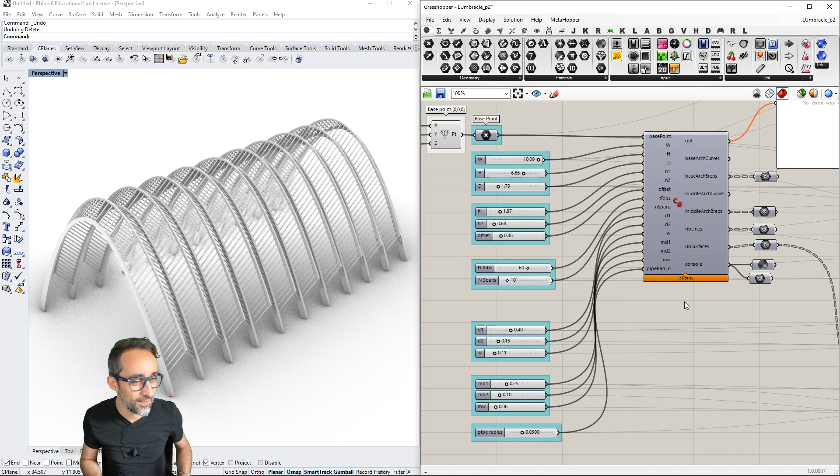Woohoo! And we're done. Okay, that took some time. How are you guys doing? Oh, I'm out of water. Okay. Woohoo, let me save this. Okay, and this is gone, I don't need to save any changes. I don't need to save this.

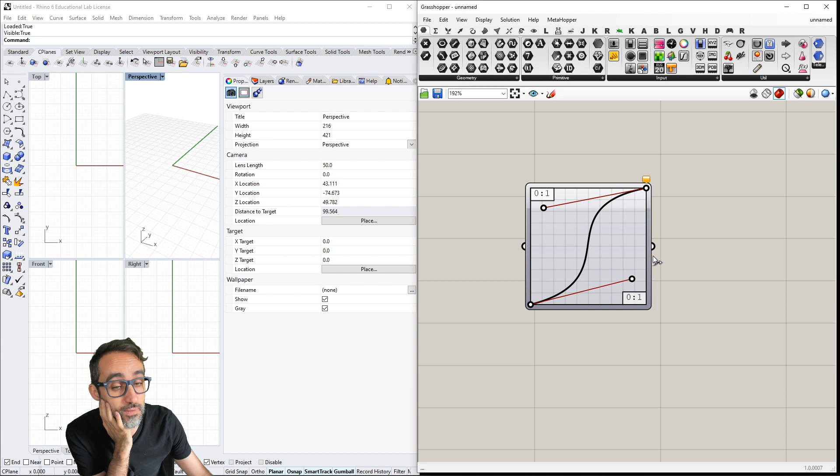Oh, I see. So you want to recreate this in a C# component with only number sliders and no tactile interface? Well, the thing with the tactile interface is that it gives you a lot of control of the curve. But there are ways where we could simplify this. We could have, for example with sliders, just the X and Y location of each one of these nodes, and have one per different component for each one of the graph types here, so the conic curve, the Perlin noise, etc.

It could be done. It's just that I find, I don't like components that require you to touch them, like this one. But I do like to control things parametrically, so it is true I would like this component to have some hooks so I can control the height of this guy and the height of this guy with sliders. But what I do like about these UI components is that they give you a very clean visual clue about what's happening, so mimicking that in C# would not be straightforward. Maybe we can think about this for some component in the future.

And then another one: guide us towards some resources to decompile the component to do the same. It will make the outputs for multi-objective optimization engines like Wallacei plugins so much cooler.

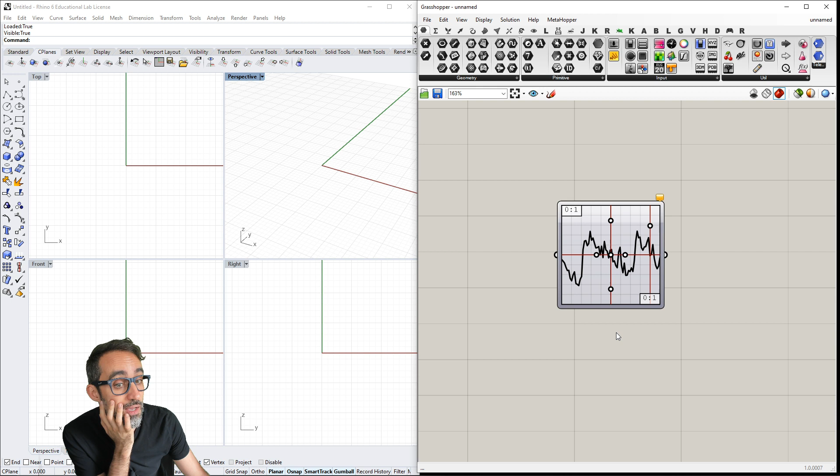There are resources to just create custom layouts for C# components. You will not be able to do this in a C# script component. You would have to compile your own native Grasshopper plugins, but there are resources out there, so you can take a look at those. Maybe we can do one of these exercises at some point here.

Benson asks: when there are multiple ways to achieve the same results, how do you decide which way to use? Is there a tool to measure the cost of certain operations in C#?

Well, there are. So if we open the file we were working on, I was using... where is this? I have this thing called the profiler on, and the profiler tells me how much time one component takes to execute. So that's a way of measuring how computationally expensive your operations are.

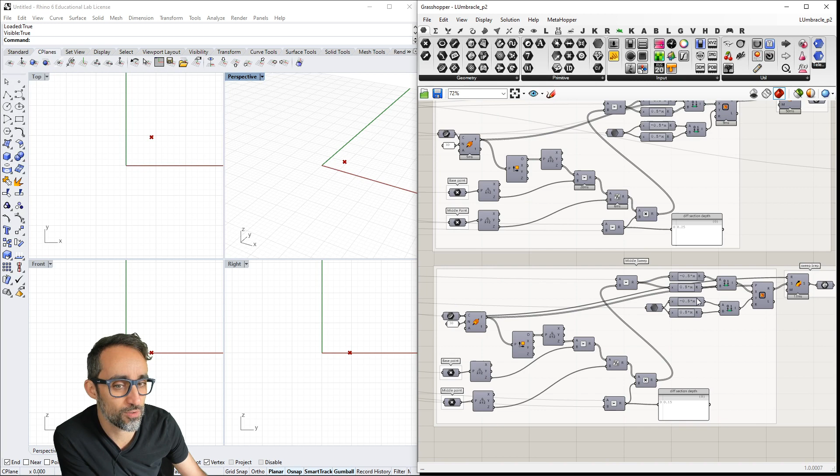Now I have this here, but what's not intuitive is to say, for example, okay all this other vanilla code all together as an aggregate, how many resources does it take? That, I don't think we can know. There's no such thing as a profiler for a group of components. That would actually be quite nice, in fact.

But this is one measure of computationally expensive. How do I choose between methods? Honestly, I do it based on experience. I've done a lot of this, so I know some methods are a bit more lightweight than others, but there are some general rules of thumb.

For example, when an operation is very generic, when it tries to satisfy as many input conditions, forms of geometry, and types of inputs, that's usually a more expensive operation, because it has to adapt to so many situations, and it takes resources to decide and come up with a data structure able to accommodate all these situations.

That was the situation we ran into today with the piping. That method was really good because you can pipe anything, over any curve. But since we only needed a very simple straight extrusion, it was much easier to do it manually with a curve and a vector, and it's also much more lightweight because it doesn't have to accommodate for all these other situations.

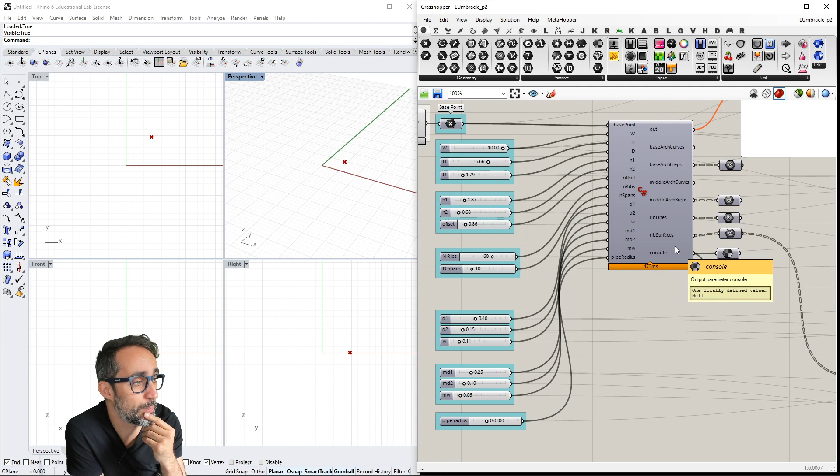Fernando asks about plans for C# classes. Well, I was planning on doing a full playlist here in the channel at some point. Let's learn C# from scratch on its own, without Grasshopper, without anything, learn the basics, and then learn how C# lives in other environments such as Grasshopper, Unity, Dynamo, vvvv, whatever you want. So that's gonna happen at some point, but not immediately.

I want to do an intro to Grasshopper, and that's probably what I'm going to do next full Saturday, recording introduction to plain Grasshopper videos. But yeah, those are my plans right now. I also think that doing exercises like we did today is a good introduction to C#. It's not a formal one, but it can give you guys an idea of how things work.

Andres Obregon asks how to code the kangaroo remove duplicate points. That's actually a fairly simple one, could be a geometry gem. Just have a list of points and remove duplicates. We could probably do that, I think.

Because it's just as simple as a for loop that checks the distance to other points, and when you find one under a threshold, you just remove that from the list. Okay, I'm gonna write it down because that's a good idea, and it's a simple geometry gem we could do.

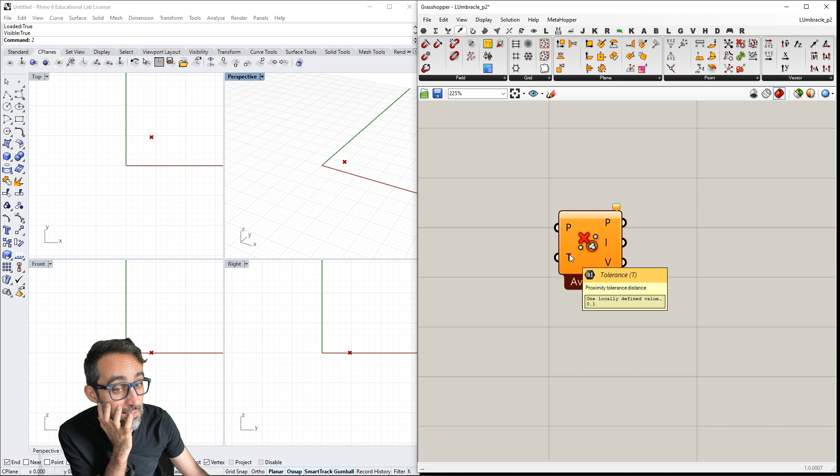There are a couple native Grasshopper components that do that, I think. I was actually talking to a collaborator who has implemented that component. Closest points, Cull Duplicates. This is exactly that - it just takes a list of points and a tolerance, and then removes those points by either leaving one, removing them all, or computing the average. So yep, we can take a look at that, it's a pretty simple gem to do.

All right, so are we ready for the weekend then? Is it that time? I'm very excited. I have a cooking project for this weekend, for tomorrow, so that's gonna be awesome. I'm gonna cook a really, really large paella tomorrow.